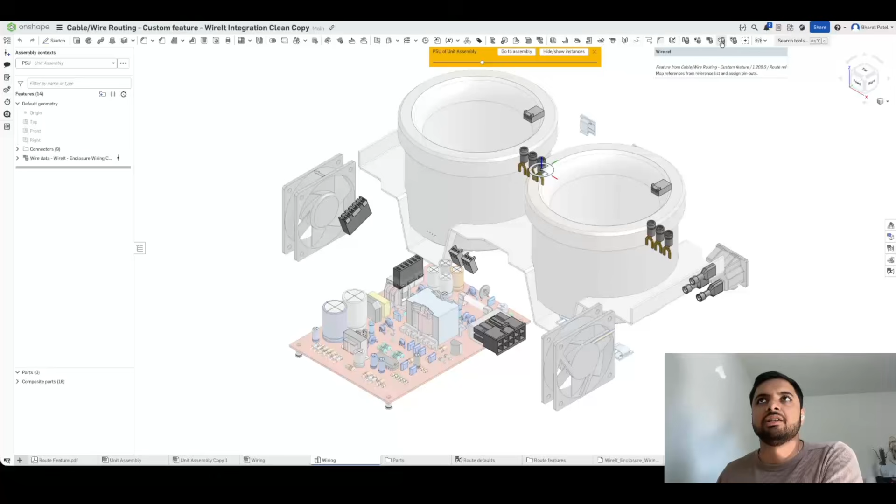And on the other side, you will be able to see the wire harness pop up in a second. And there it is. So at that point, all you need to do is create a wire reference and say we have a PSU. So I'm just going to use a PSU number and just select the part here and click next. And the other one for this example will be the power connectors. So that, and then select each one of them individually,

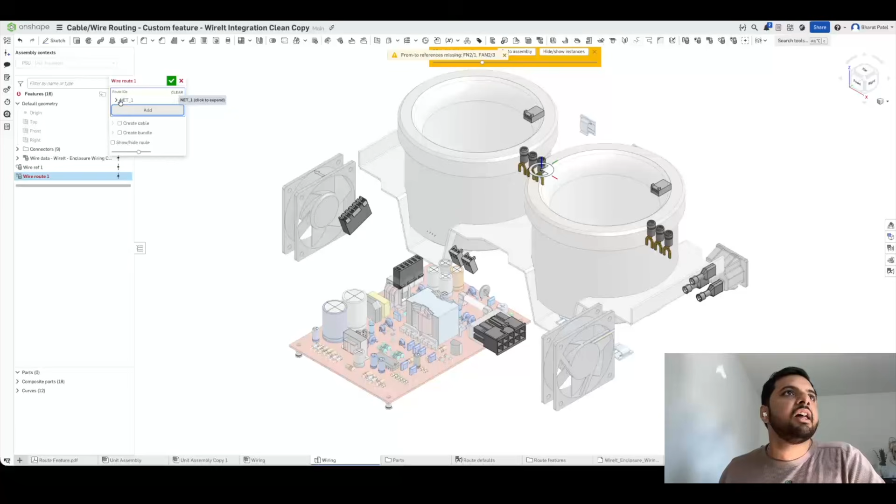and done. And for this example, I'm just going to show you how to route things. So all you do is add one, and then open up the custom tables and see which net you are working with. It is net 1, 2. So all you do is just type that net, hit enter. And as you do that, you can see the wires or nets show up. You can click edit route for that net, click on the button here, and snap it to a lacing tape or a clip in this example.

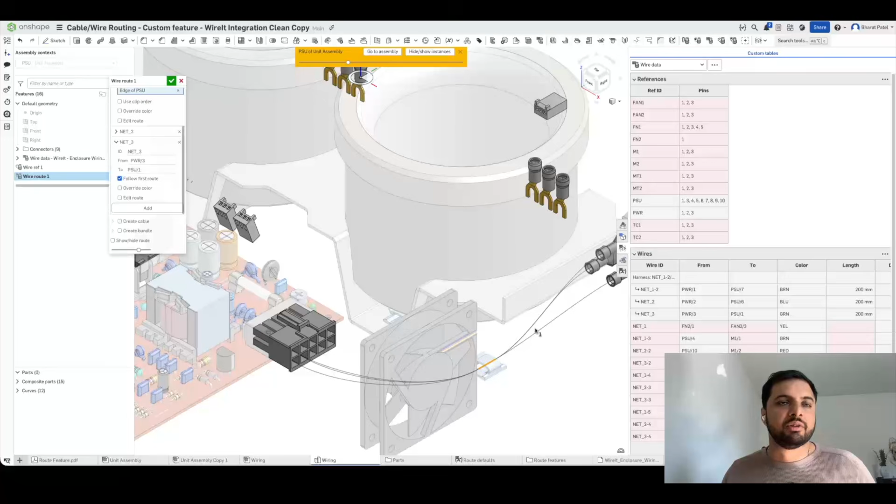And then afterwards, you close it and then hit add one more. And as you can see now, it's starting to add more nets. And the next one is you just click on follow the route. So they will all follow the route to the first one. And at this point, all you do is click create a cable because it's a cable, and then in 3D. So now you have a cable here. You can later adjust things as you need. However, I'm just going to turn this off.

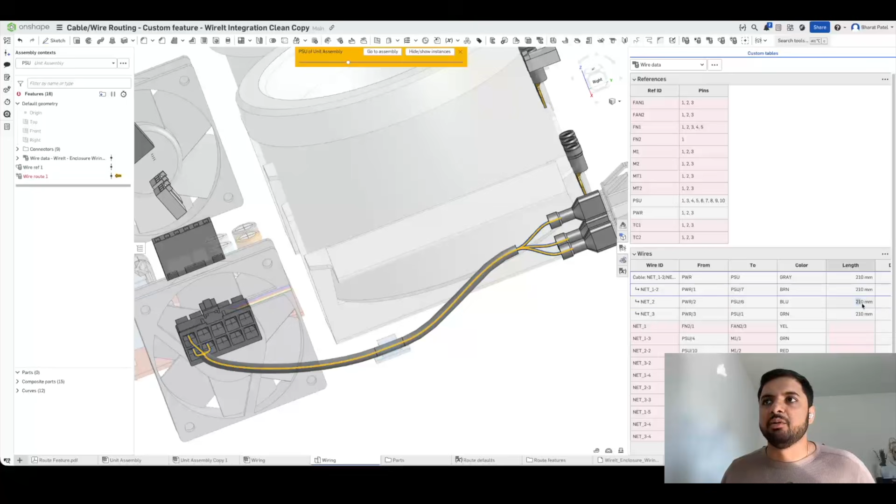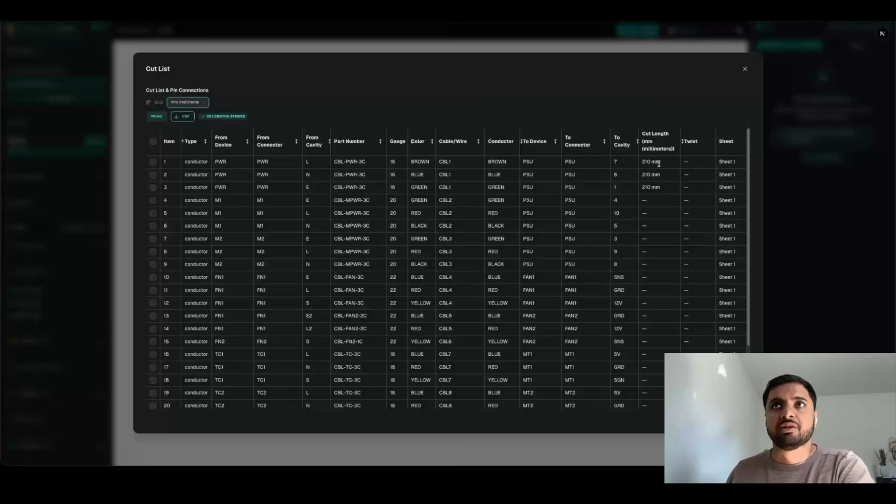And the important thing here is that the length of the wires, or individual conductors in the cable, have been defined here. And if you go back to WireIt and open up the cut list, you will be able to see the lengths synced to the actual drawing. So boom, you have this in millimeters, and I think the other way was 210 millimeters. So there you go. Yep, that's it.